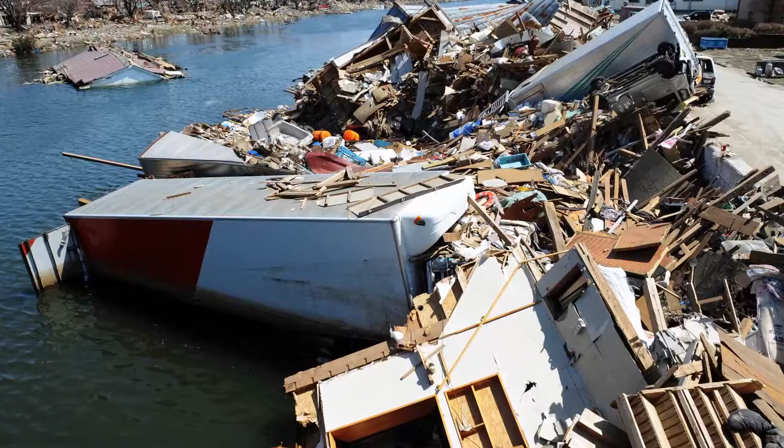In recent years, damage caused by localized torrential rainfalls, a direct result of global warming, is afflicting much of the world, and those disasters can come at the cost of many people's lives. Porous concrete was created in order to adapt to environmental changes that are advancing on a global scale. It is porous concrete that links urban and natural environments with water.

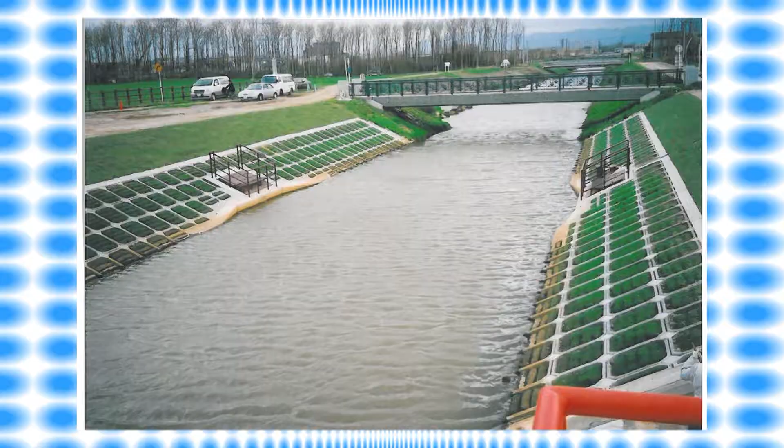Hokkaido Poracon has been producing porous concrete products for 45 years. Our products have been used for roads and both public and commercial facilities across Japan, assisting in harmonizing the often challenging relationship between the urban environments and the natural environmental cycle.

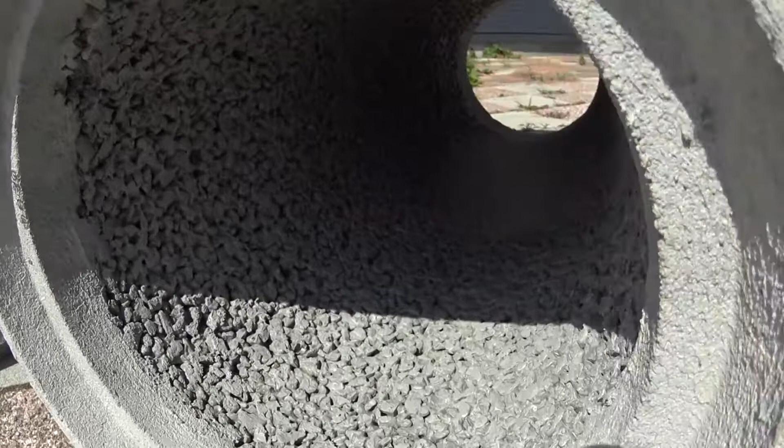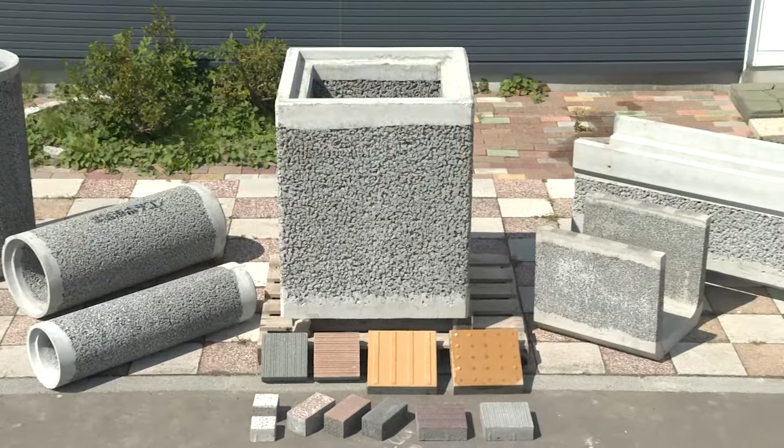The greatest feature of porous concrete is literally its porousness. The concrete has countless holes on its surface, which are key in providing a high degree of permeability and allowing rainwater to penetrate otherwise impermeable surfaces. Rainwater can therefore dissipate into the ground. In other applications, porous concrete can also assist in the collection and storage of water.

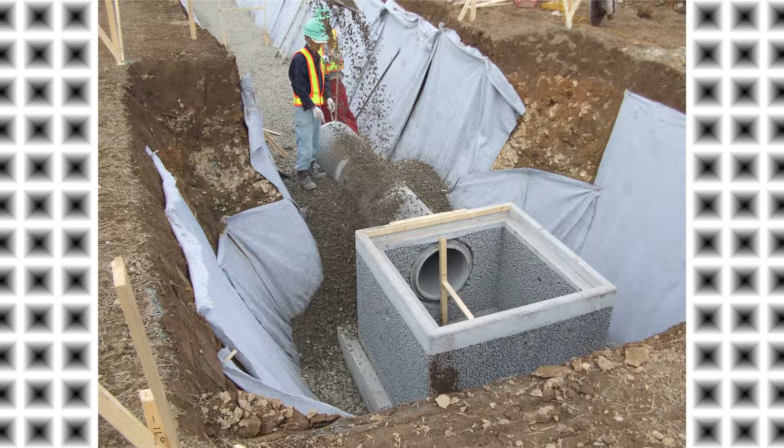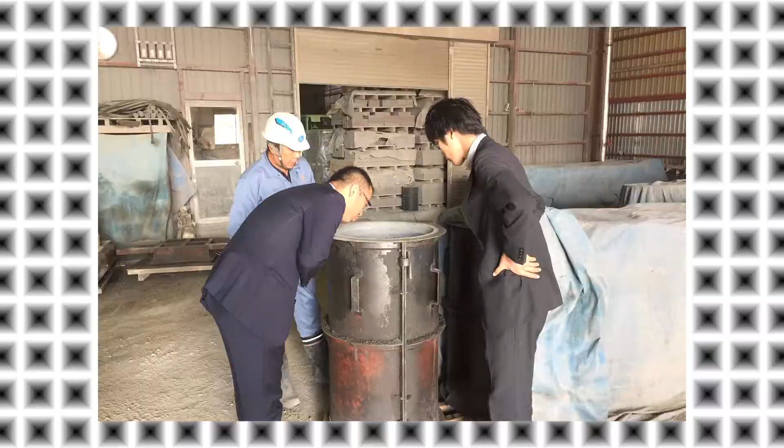In addition to its penetration and catchment of water, porous concrete can also be used for other purposes such as the absorption of heat and sound, water irrigation required by vegetation, water purification, and so on. It is estimated that Japan utilizes porous concrete most widely in the world. We conduct joint research with universities in a continued effort to be the industry-leading concrete company in Japan.

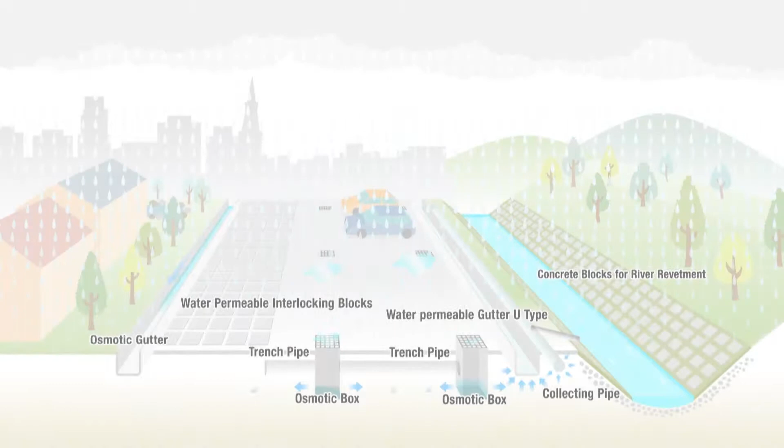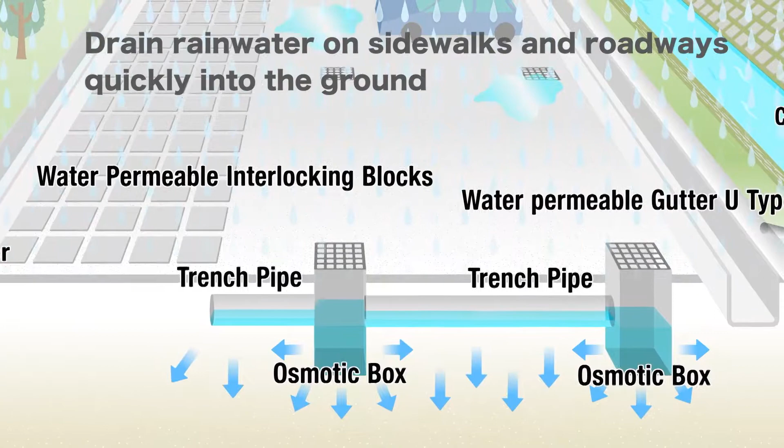In Japan, porous concrete is commonly used in the following situations: to collect rainwater that has permeated soil and channel it to a sewer or a river, to allow rainwater to penetrate the ground and thereby prevent floods, to keep surfaces safe by quickly draining rainwater into the ground, for example in its applications on sidewalks, roadways or open spaces, and so on.

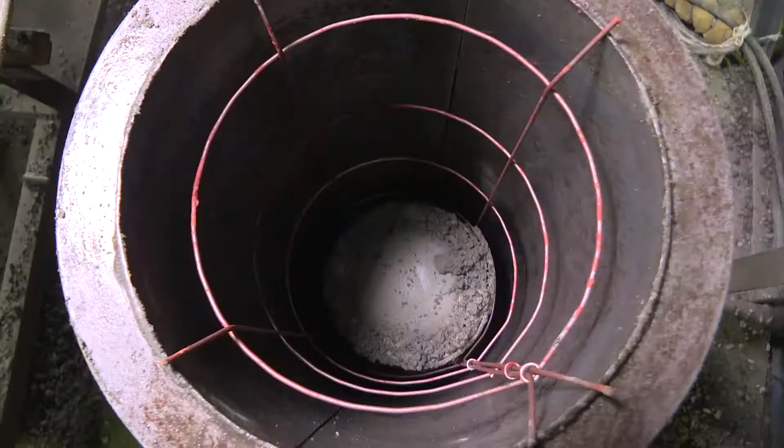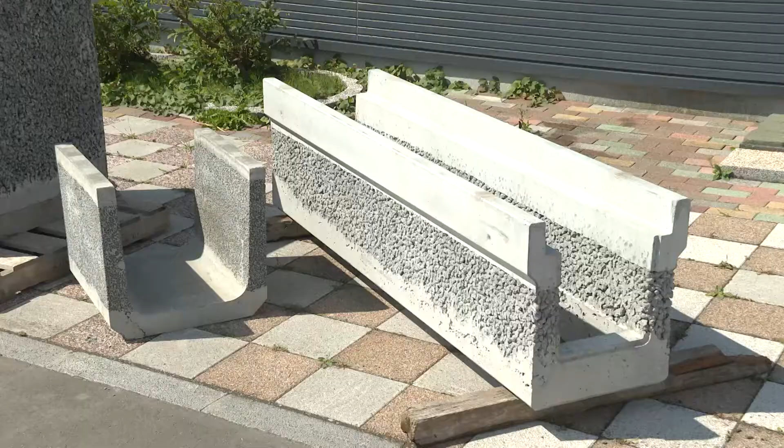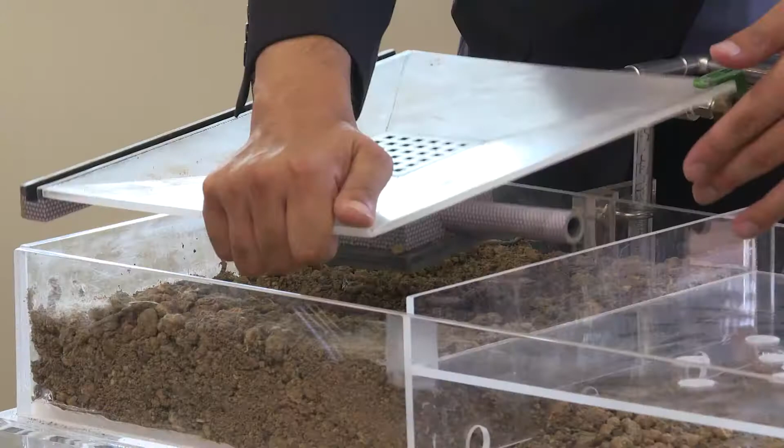However, consideration should be given to the application of concrete to a given site and its lasting effects on the surrounding environment. In order to restrain rainwater outflow, it is essential to hold a consultation about the suppression of rainwater outflow by having a good grasp of the location and circumstances of the site and consideration of the estimated rainfall in the area.

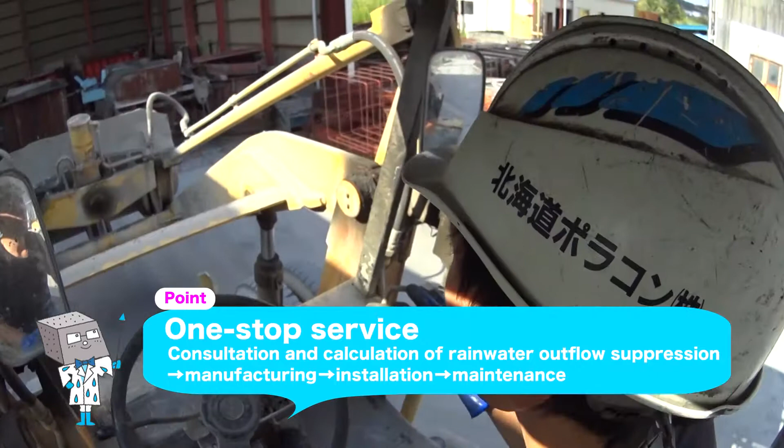Hokkaido Poracon is the only company in Japan that offers a one-stop service providing customers with the necessary consultation and calculation of rainwater outflow suppression, product manufacturing, site installation, and any ongoing maintenance of the product.

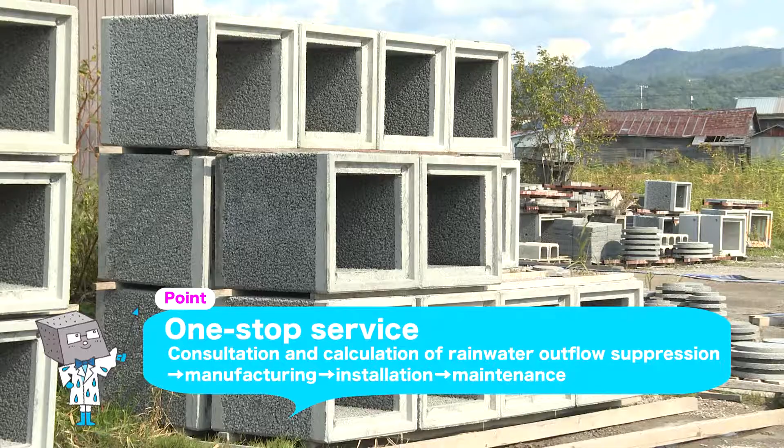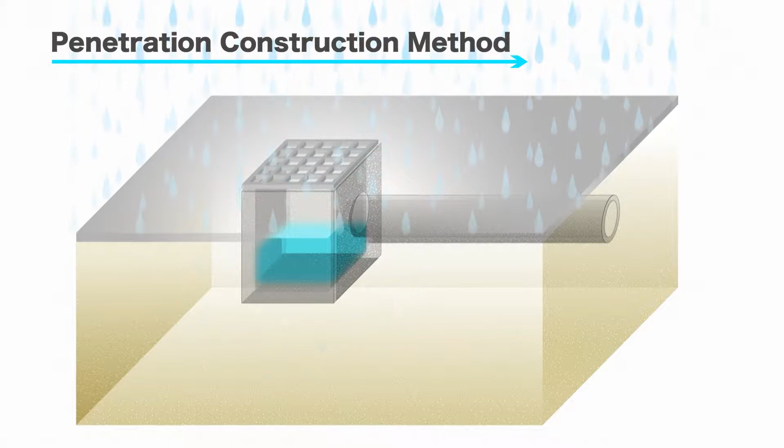The penetration construction method is the most popular method making best use of porous concrete. The method is comprised of various product elements, including boxes, trench pipes, wells, and gutters. By applying multiple elements of our solution, as much rainwater as possible is returned to the natural cycle, improving flood prevention in urban environments.

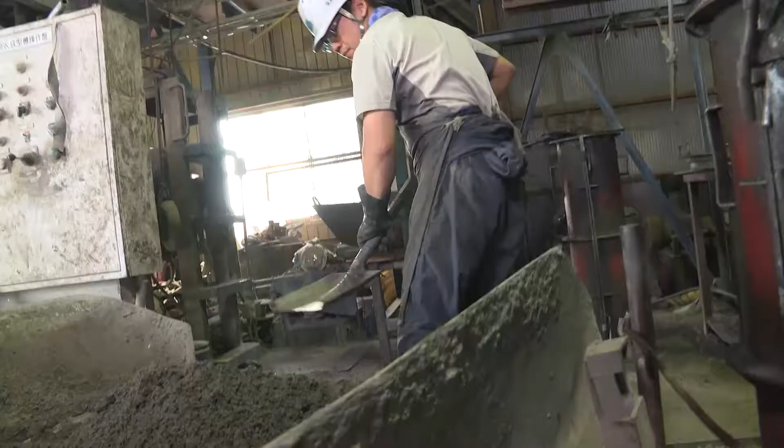Hokkaido Poracon tackled the ongoing problem of urban-based flood disasters ahead of other companies and has successfully developed, manufactured, and applied porous concrete products with uniform continuous voids. We have also developed a construction method that resolves the ongoing problem of sediment deposition and the resultant clogging, which ensures a stable and consistent functioning of water penetration in our products.

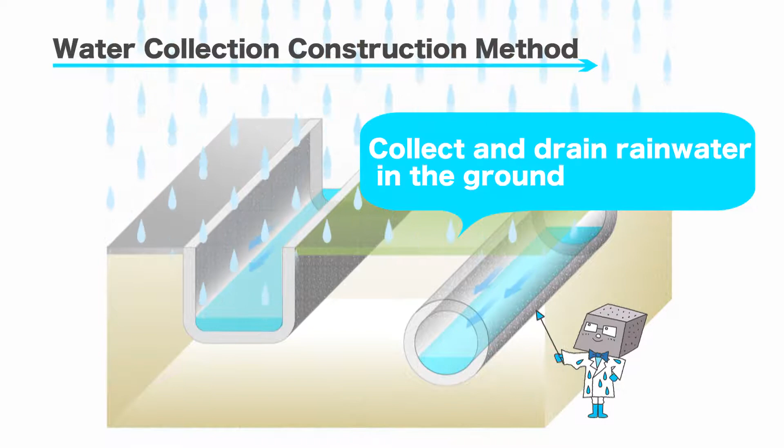Porous concrete can also be used in the water collection construction method. Water-permeable gutter U-type and porous concrete pipes collect and drain water from the soft ground, alleviating the possibilities of landslides and preventing land upheavals. The soil type common in many countries, including those in Southeast Asia, tends to expand when wet and shrink when dry, causing serious damage to infrastructure. Porous concrete can be utilized widely in these areas by normalizing soil moisture content.

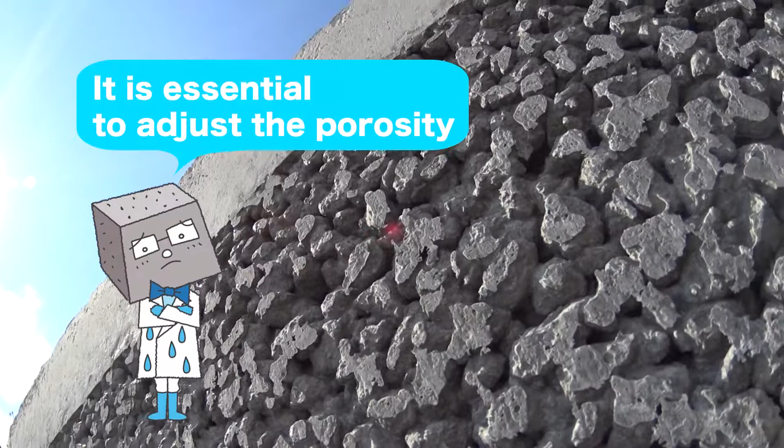The application of porous concrete solutions to a specific situation needs to consider both the penetration and water collection characteristics of the concrete, for which it is necessary to adjust the porosity of products. We have accumulated required know-how on this specialized subject.

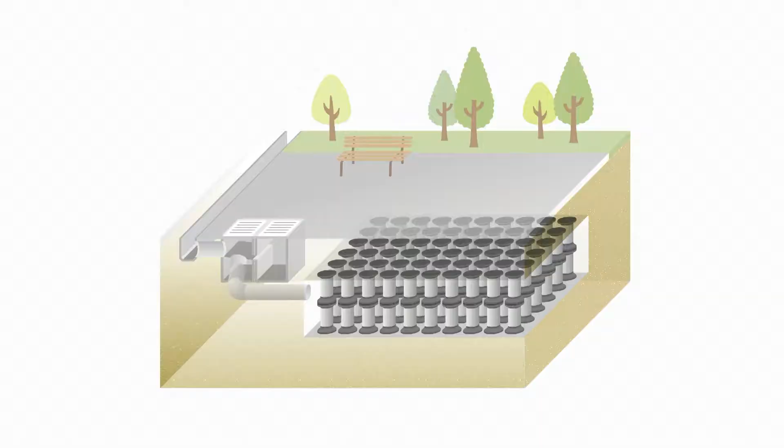Hokkaido Poracon also offers an underground storage construction method in which rainwater is stored in a plastic storage tank. The stored rainwater is then distributed to the ground or carried to wastewater treatment facilities. This method is suitable for runoff control at large-scale facilities.

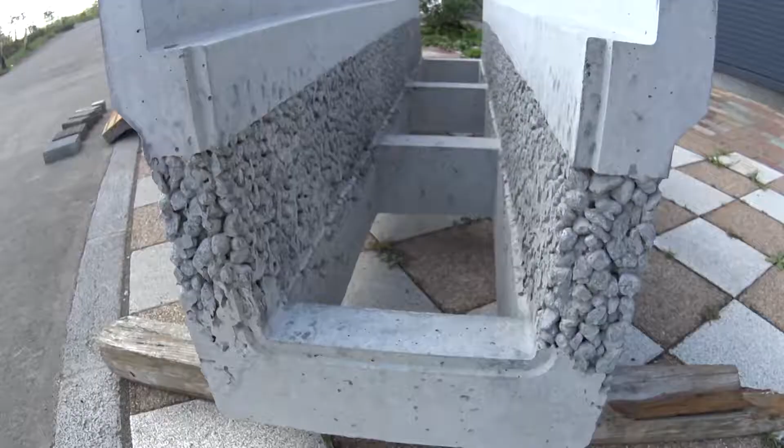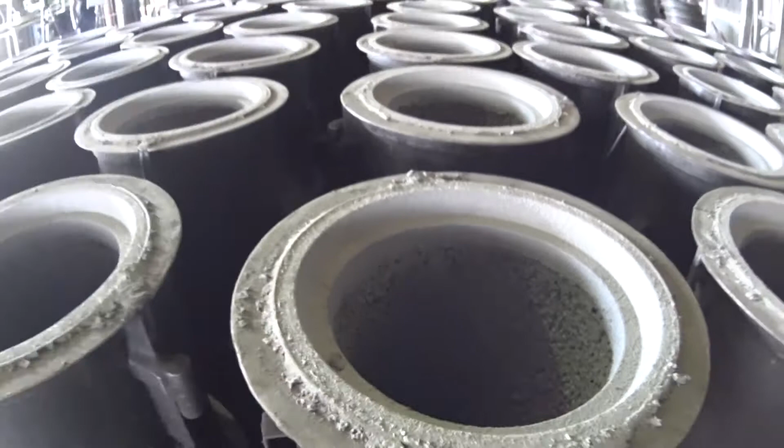For the most efficient and effective operations, and for the best performance in runoff control, Hokkaido Poracon promotes porous concrete products to the world, making use of planning, consulting, and manufacturing abilities according to the situation.

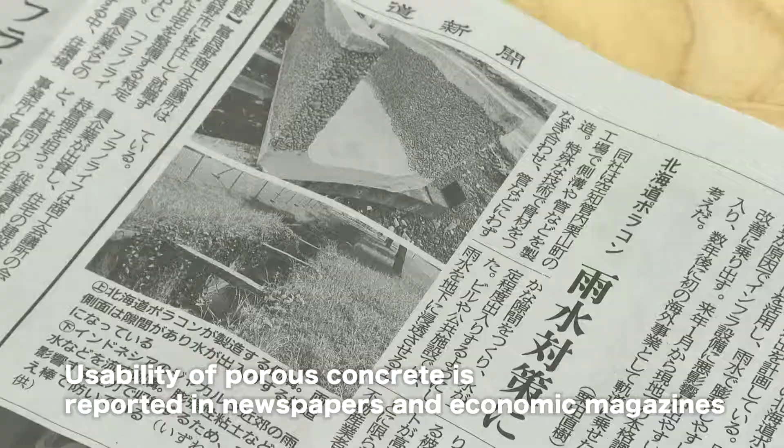In 2019, we commenced a project in Indonesia, commissioned by JICA, the Japan International Cooperation Agency, which is an affiliate of the Ministry of Foreign Affairs, to bring expertise acquired in disaster-prone Japan to the world. That is our mission.